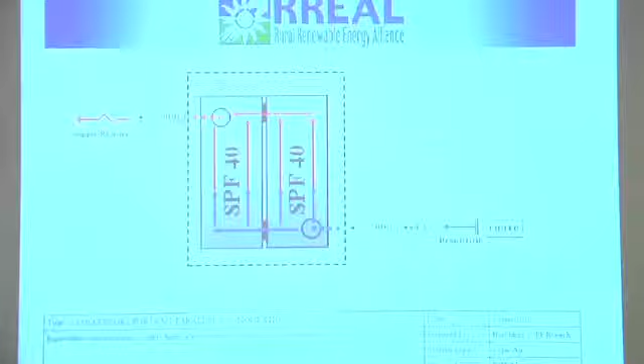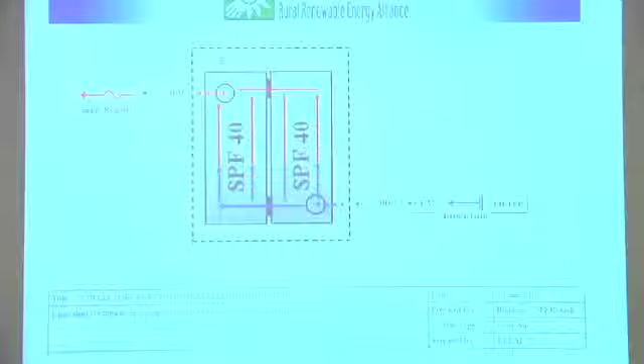Now, the reason I emphasize that is because we kind of took a chapter from the flat plate solar water heating industry, and we applied it to the solar air heating industry. So when we started our business in 2000, quite frankly, we had no intention whatsoever of becoming a manufacturer. When we started, we wanted simply to deliver solar thermal to low-income communities and low-income families.

And so what we did is we purchased product from all across the world, from Canada, from New Mexico, Michigan, New England, and we delivered solar thermal systems to low-income families. And we had the opportunity to work with a really broad spectrum of solar air heating collectors. And we learned what worked, and we learned what didn't. And we learned a lot more about what didn't. And one of the things that was challenging was doing relatively large arrays. It was very difficult with existing product to do large arrays, either large residential or commercial arrays.

So we simply said, there's a lot to learn from the flat plate solar water heating industry. Let's see how we can apply that to the solar air heating industry. So basically, we created an internal manifold. So for those of you that are familiar with flat plate solar water heating collectors, you're able to couple them like Legos with an integrated manifold. We can do the same thing now with solar air heat, which is why some of those commercial installations that I showed you earlier are possible. That's why those system installations are possible.

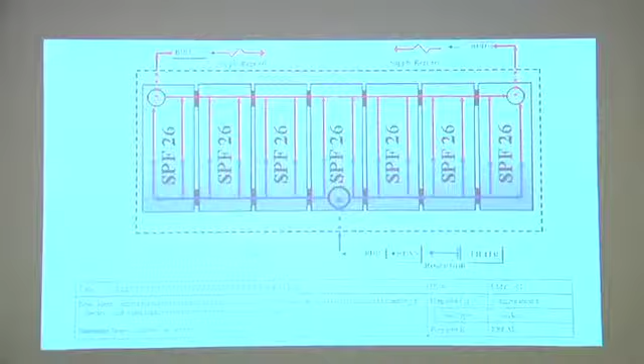So like I said, not only can it be done at the residential level, but also at the commercial level. So I just want to point out that you've got your grill there, basically, your air handling unit, your backdraft damper, 7 collectors, 2 supplies, and it looks like this on a building. This is a transportation garage in St. Louis County. Only for 4 months out of the year does this building require any additional heat beyond the solar air heating system. And even during those 4 months, it's about a 50-50 between the solar air heating system and the gas backup. So it's a very powerful technology.

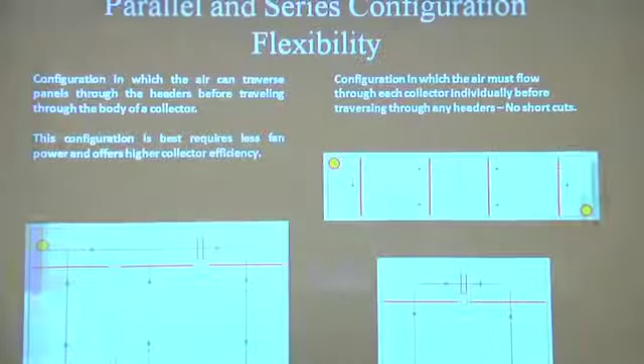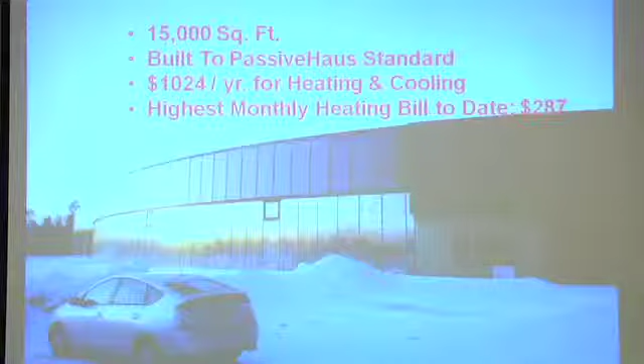So the solar air heating system on this building is doing a solar fraction of about 35 to 40%. So it's a really flexible technology. Not only can you do parallel connections, but you can also do series connections. So I want to share with you now just a brief case study of the building where we actually manufacture our collectors. It's a really unique building. It's 15,000 square feet. Our highest heating bill for the entire year for this relatively large building was about $1,000. Now again, that speaks to the power of efficiency because this building was built to the PassiveHaus standard.

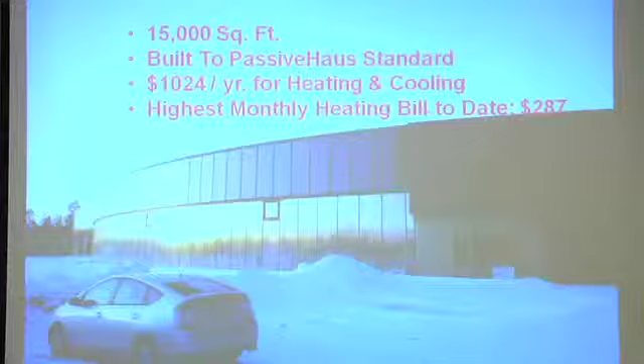It didn't quite meet the certification, but it's very close. It's 14-inch SIP walls, extremely well insulated, and it also has a large storage system. So earlier I said that typically solar air heating systems don't have storage other than a well air-sealed tight envelope. With this building, there's actually an exception. We do have a large storage system with this building. Typically we don't encourage that, but with this building, we were experimenting since it's the building where we make the collectors. And again, you can see all 76 collectors across the building.

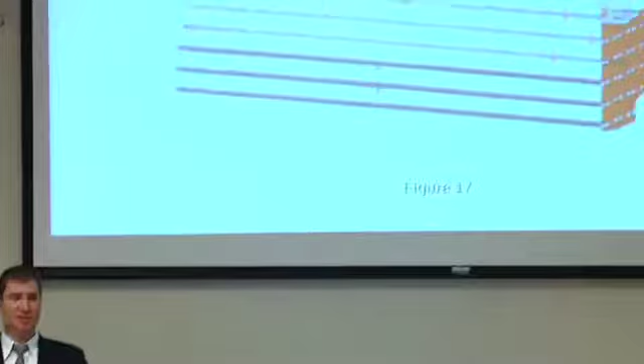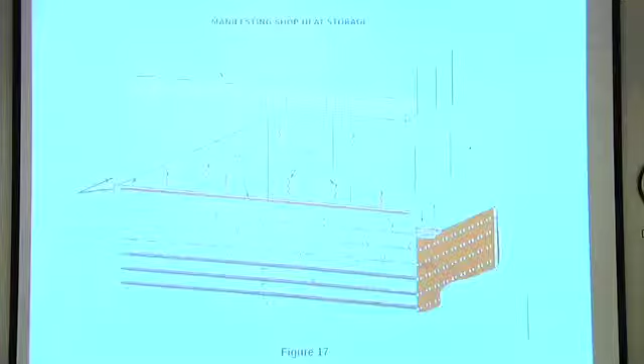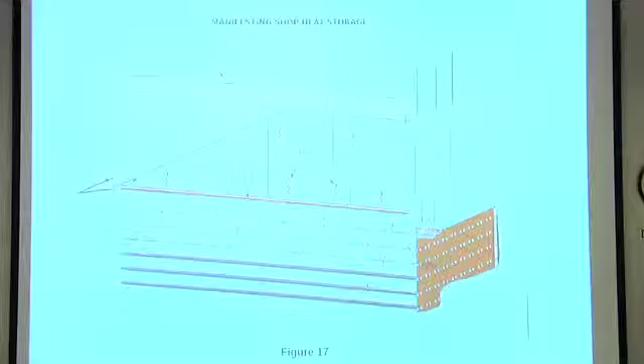And this is what the storage system looks like. So beneath the building, we have a massive sand bed that's insulated. And the air is literally pumped through the sand, through a corrugated drain tile of sorts. And that sand is actually charged year-round. So even in July, we're sending heat down to the very bottom of that sand storage. So then in August, we send up to the next layer. In September, a little bit higher. And then during the heating season, the vast majority of the energy is being delivered just below the slab.

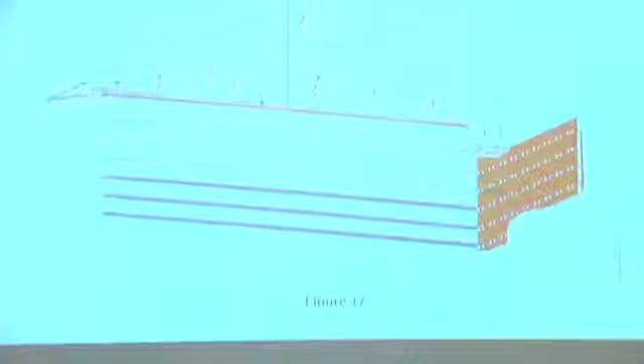And as a result, this building has a solar fraction of between 60 to 80% depending on the year. This year, because it was pretty mild, it was closer to 80. So it's a really interesting building. Here you can see the installation underway. And by the way, solar air heating collectors are typically a vertically mounted technology. Why do you think that is? Not always. It can certainly be roof mounted. It can be ground mounted. It's very flexible, but we always encourage people to vertically mount when possible.

Why? Todd. Well, structural issues are almost eliminated, and if you're a winter-only collector or a swing season in winter, it's the best angle. Absolutely. Those are two huge ones. Architecturally, it's very easy to attach to the structure of the building. If you can get down to the sheathing like this, always put your collectors on the sheathing, not on siding. And as far as solar resource is concerned, you're always trying to obtain perpendicularity with any solar technology. So for heating seasons, we approximate perpendicularity because the sun, of course, is lower in the sky. So you get greater performance.

The other thing is with my systems, I have an off-grid solar electric home. After a heavy, wet snowfall, I'm without power often for a significant period of time because I've got an angled mount on the roof. It's steeply pitched even, and snow can slough off there. But for a period of time, it's definitely not producing much of anything. Sometimes I throw snowballs at my array because I don't want to get up on my metal roof after a heavy snowfall. With vertically mounted solar air heating collectors, non-issue. We never have snow buildup on a solar air heating collector.

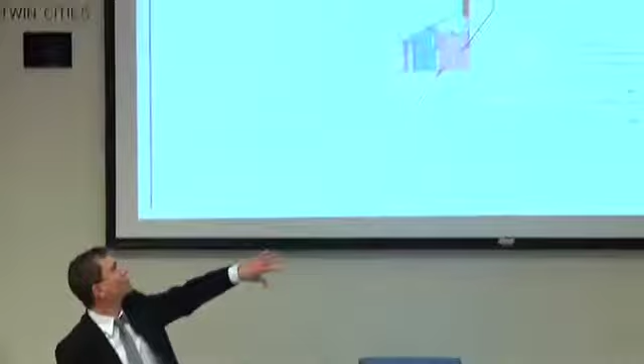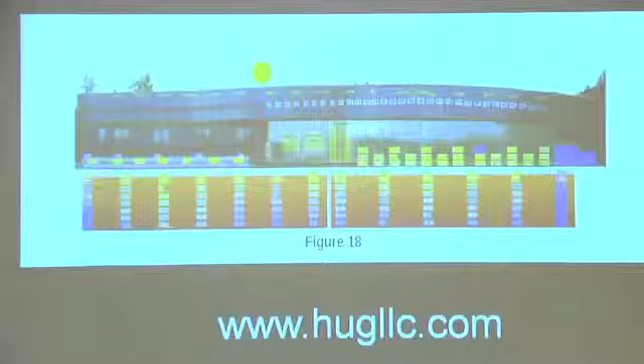So here you can see just a very brief schematic of how the solar air heating collectors actually get down to the storage. I won't go into a lot of detail about this, but I will share the fact that you can monitor this entire system right now. For those of you that have access to wireless, you can see what any one of these sensors are right now. So we wanted all this data to be publicly available. So you can go to this website and look at every single sensor. There are about 1,000 sensors in this building, about half of which are in the collectors, the other half in the sand storage. You can see the collector temperature instantly at any given point in time. You can look at historical data. So it's a really interesting building.

And by the way, if anyone is interested in coming and taking a tour, you're more than welcome to do so. Pine River is about a 3-hour drive, though. And we think that solar air heat can be incorporated into commercial buildings in a way that looks sharp also. And it also can replace siding. You noticed earlier from the installation photos that there's no siding above and beyond the solar collectors.